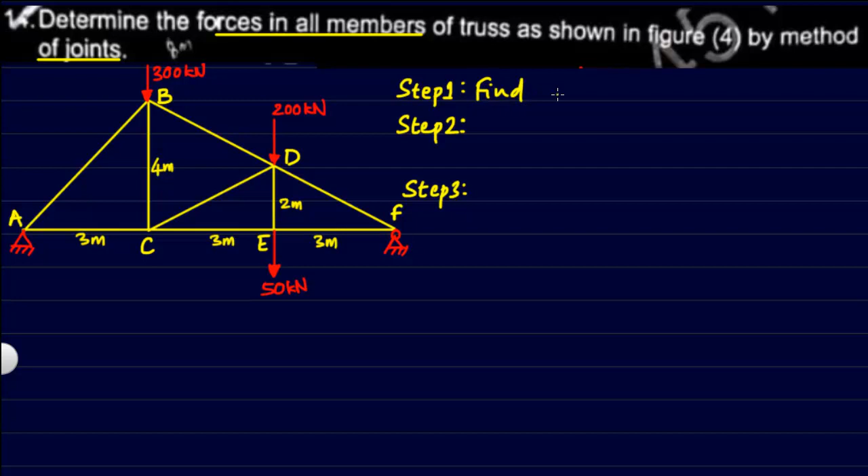Since the problem is going to be very long, let me walk you through the steps we will take to solve it. Step 1: find reactions at the supports. Step 2: take the FBDs of joints with 2 or less unknown forces and find them. Step 3: after solving all the forces, note them down in a table. Now let's go ahead with the first step.

As I told you in the first step, we will have to find the unknown reactions at whatever supports we have. While doing this, the whole truss has to be considered as a single body, and we take up all the forces on it to find the reactions RA and RB.

Since all the forces here are vertical, let's first take up sigma V. RA is positive upwards, so is RB, and the remaining forces are downwards, so we take them as negative. This being a problem of statics, the total has to be 0. This gives us the sum of RA and RB as 550 kilonewtons. Let's call it equation number 1, and let's go to the next equation.

Sum of horizontal components is of no use to us because there are no inclined forces here. So we will have to take up sum of moments, and one of the two points we can take as reference is either A or F. I'll just go with A.

Now I have to take the moment due to all the forces acting on this body about point A and add them together. RA is the reaction passing through A, so its perpendicular distance is 0, and hence it will not have any moment. So the force of 300 kilonewtons...

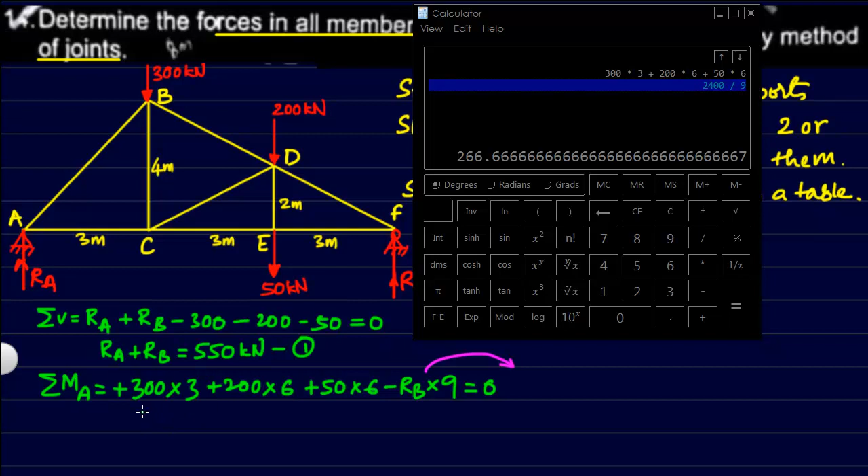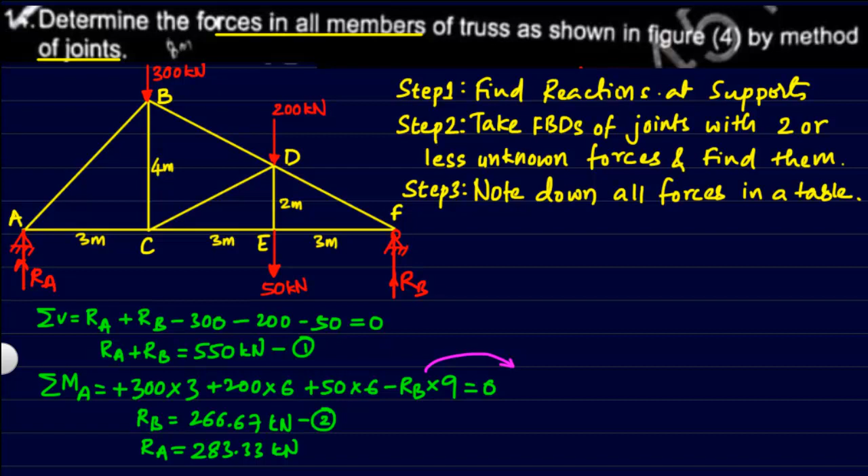Kilonewtons. Let's call it equation number 2, and by substituting RB value in equation 1, we get the value of RA as 283.33 kilonewtons. Now note down the reactions in the figure like this, and that completes our step 1.

For step 2, we will take the FBDs, that is the free body diagrams of joints. One of these joints we'll have to take - either A, C, B, D, E or F - and we choose it such that 2 or less forces are unknown at that point. So it's a good idea to start with the corners, which are the supports themselves. I'll start by taking this particular joint over here.

And now I have to put all the forces here. The force RA we were already able to find in step 1. The two other forces acting in the beam are AB and AC, so those two are unknown. This is the force in AB, and this here is the force in AC.

Now before finding the forces, we first have to find this angle here. In this triangle ABC, we know the opposite and adjacent. So alpha will be equal to tan inverse of opposite length, that is 4, divided by adjacent length, which is 3.

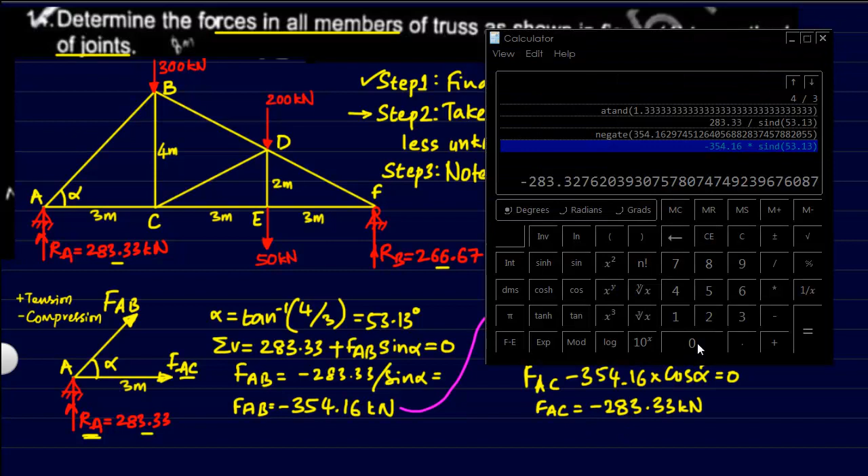Because the joint is static, in equilibrium, the total has to be 0. The value of FAB we can substitute from what we found, but be careful about the sign convention. Here, because FAB itself is negative, the positive will actually change to negative, and cos of alpha, this total has to be 0. So FAC we can calculate by sending this whole term to the other side. Calculating that gives us this result, 283.33 kilonewtons. So once again the result is negative, meaning it is actually compression.

So here I have written the two forces that we just found for your convenience. Now let's consider the next joint where we can find the unknown forces. Adjacent to A we have joint C, wherein there are 3 unknown forces, so we cannot take this as our next target. Looking here, we can see that one force has already been found and there are 2 unknown forces here, so this would be the right joint for us to take. Let me now take the free body diagram of that particular corner and start solving the problem.

Once again, wherever the beams are cut, we should assume that the forces are acting away from the point. This value here we already know, that's minus 354.16, and the other 2 forces are not known to us. So this will be the force in BC and this will be the force in BD.

Now, before starting the solution, we should know the angles. So these 2 angles are to be known. The angle here will be same as alpha, because these two angles become alternate interior angles for the parallel lines, and hence alpha will be same here. Coming to this angle, let's call it beta, so we can find it using this angle here.

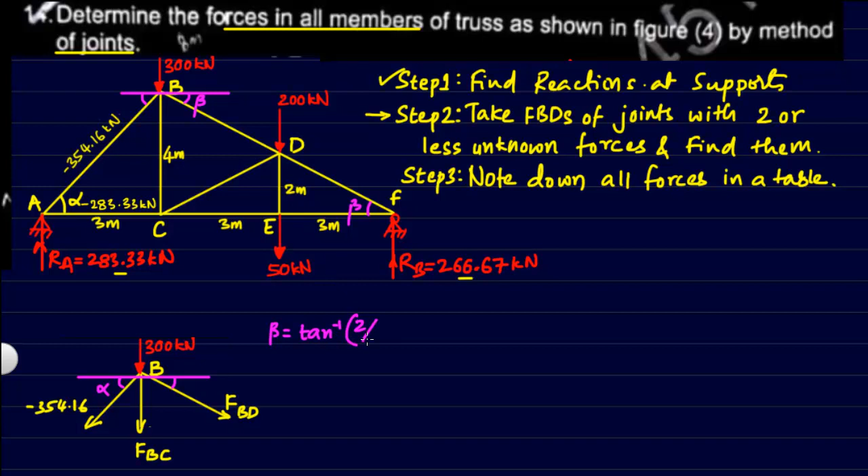So let's take up this triangle DEF. In that, again we know the value of opposite and adjacent, and using that let us find it. The angle beta will be equal to tan inverse of opposite length, that is 2, divided by adjacent length, that is 3. That gives us an angle of 33.69.

And of course alpha we had calculated before as well. Its value is 53.13. Now once again we will have to apply the equations of equilibrium here.

Let's start with sigma H, because FBC is vertical and we want to ignore it in our first equation. We want only one variable at a time so we can easily solve it. 300 kilonewton and FBC are both vertical, so they won't affect the horizontal direction. We take this force, minus 354.16, multiply by cos of alpha to get the horizontal component, then take FBD and multiply by cos beta for its horizontal component. We assume it acts on the right side, so the horizontal component comes out positive.

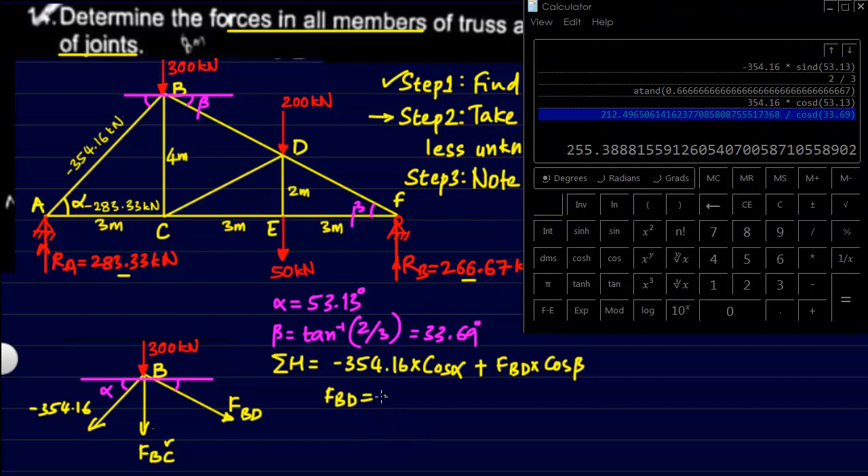When calculated, we get FBD value as 255.39 kilonewtons. Next we take all the vertical components and add them.

300 is acting downwards, so it's negative. FBC is also acting downwards, so negative again. FBD will have its component acting downwards, so negative, and to get that component we multiply sine of beta with this. Then on the other side we have the force minus 354.16, and we multiply sine alpha with this to get the downward component. One more thing to note: because the arrow in the diagram points downwards, we apply one more negative sign. This value as a force is taken directly from the diagram, and the extra negative sign is for the direction of the arrow.

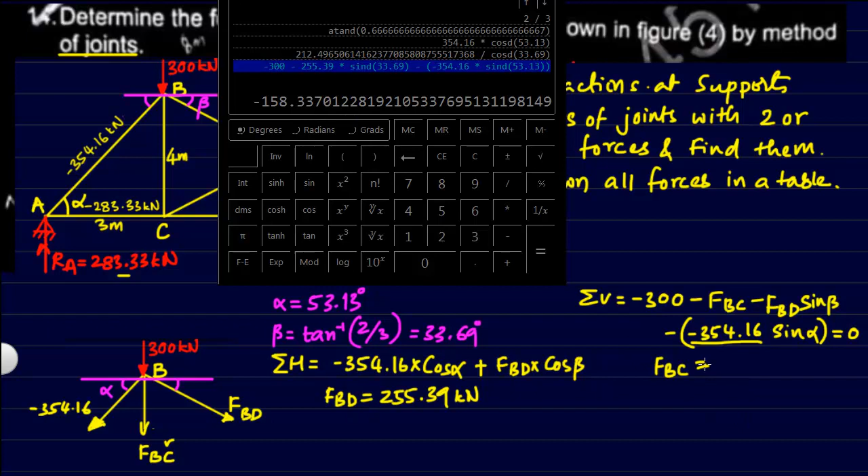Because this is a problem of statics, the total has to equal 0. Calculating this with the calculator, we get this value. You can pause the video to check the calculations. Just note down this: minus 158.34 kilonewtons.

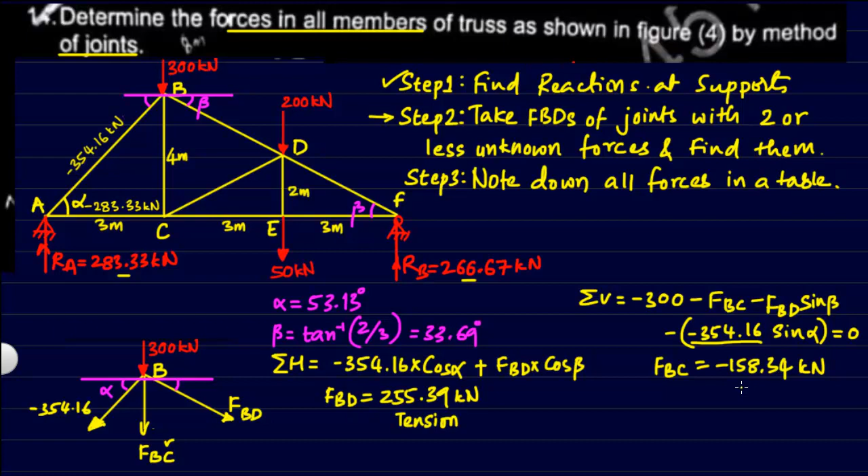So we have to understand, because the value of FBD is coming out positive, it is in tension, and because FBC is coming out negative, that means it is in compression.

The values we just found I have written here on the diagram for your convenience. Let's figure out which joint to take next.

Even though at this point C can be taken, because there are again only two unknowns, it's better to actually start from the other end because that provides simpler ways of solving. And as you already know, no matter what approach you take, the final results are going to be the same.

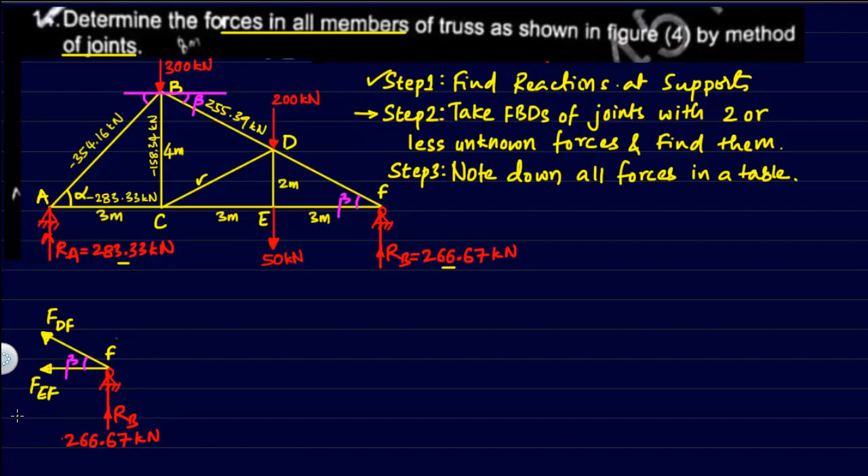So let me take the free body diagram of corner F and start solving. As usual, all unknown forces we assume to be acting away from the corner, and we give them names. This is FDF, and this force here is FEF, the force in EF. Here the angle beta, if you remember, we had calculated it to be 33.69 degrees.

Now let's apply the equations of equilibrium. I want to start with sigma V, because that will help avoid the horizontal force FEF. First we take RB, that is 266.67, and because it is acting upwards we take it as positive.

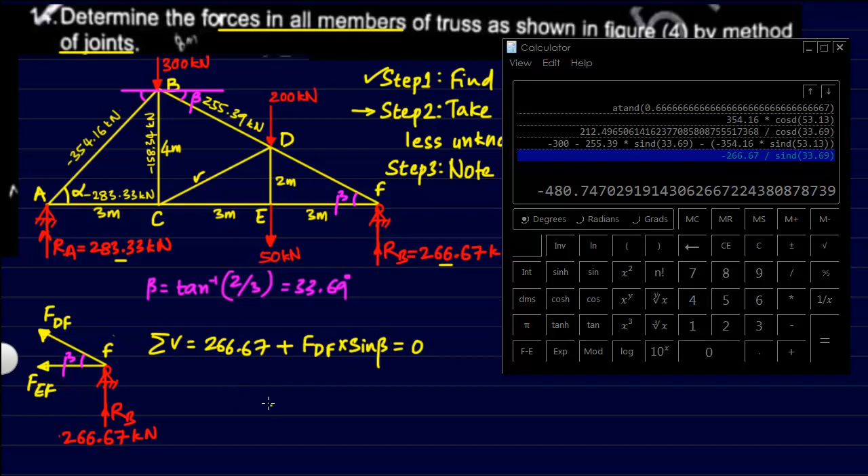Then we take the component of FDF, and because it is going up and away, we take it as sine of beta, and this component is acting upwards so it's positive. Again the total has to be 0 because it's in equilibrium. Doing the calculation for FDF, we get its value as minus 480.7. Because it is negative, that means it is in compression.

Next we take all the horizontal components. FEF is acting on the left side, so it's negative. The component of FDF, to get it, we multiply by cos beta, and because it's acting on the left, we take it as minus. Once again the total has to equal 0.

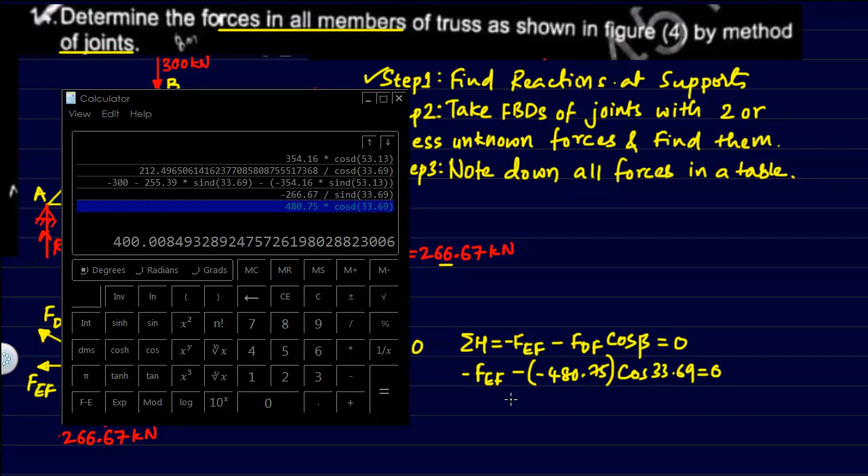Now let's substitute the value of FDF. So minus FEF, this minus as it is, and the value of FDF itself is again minus, and of course the cos of beta value being 33.69, total has to equal 0. The minus into minus will cancel out the negative sign, and solving for FEF, we get this result. Because it is positive, this is in tension.

Once again, I have noted these two forces that we just now found here on the diagram. That leaves only 3 beams in which we have to find the stress, and joint E seems to be the simplest of the joints for us to take up next. So let me take the free body diagram of joint E and put down all the forces. Two of these forces are already known to us. This force here is the force in ED, and this force here is the force in CE. Both of these are unknowns and we have to find them.

Equations will be very simple. Sigma V will just have FED acting upwards and 50 acting downwards, total equals 0. FED will give us 50 newtons. Of course, because this is positive, it will come out in tension. Then sigma H will give us 400 kilonewtons acting right side, and FCE acting on the left, so total of course is to be 0. That leaves FCE value for us as 400. Of course, even this is positive, so it will be in tension.

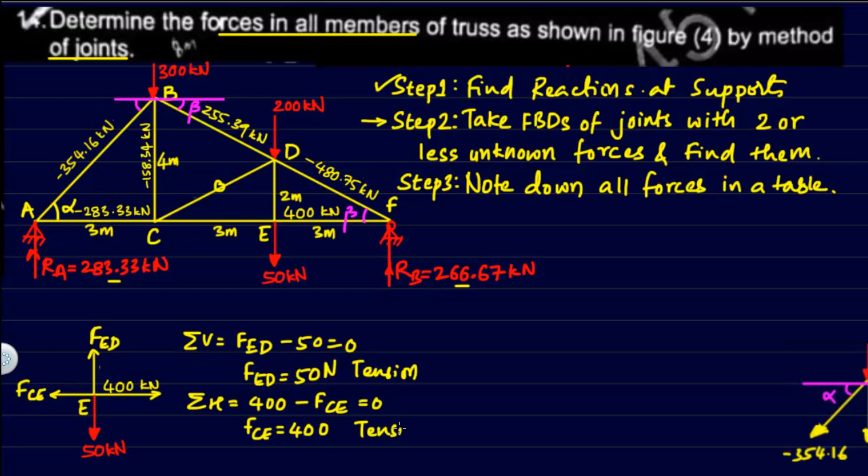Now that leaves us with only one truss, CD, in which we have to find the stress. So we can take up any one of the joints, either C or D. But the point D will provide us with a lot more complications than point C, so let's go ahead and take C. So this here is the free body diagram of the joint C.

So here I have noted down all the notations for the forces, and we will need this angle here. In the main truss, we can see that angle appearing over here, and you can see that these two triangles are exactly symmetric, actually congruent. So the angle beta will appear here as well, the same angle beta.

Since there is only one unknown force, we can either go with sigma H or sigma V. But since sigma V helps me avoid two of the forces, I'll go with that. We can see the force FBC is acting upwards, so it's positive. And the component of force CD we have to take, since it is opposite, we have to multiply this with sine of beta. In the diagram we can see it's acting upwards, so it has to be positive. The total, of course, has to equal 0 because it is in equilibrium.

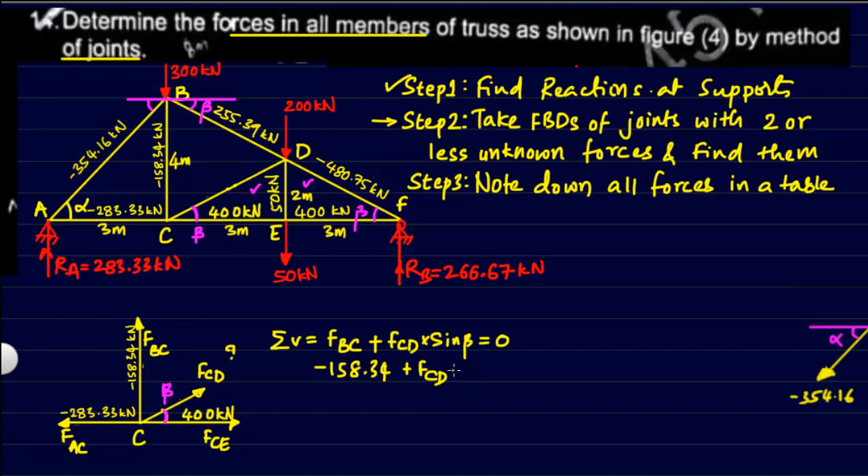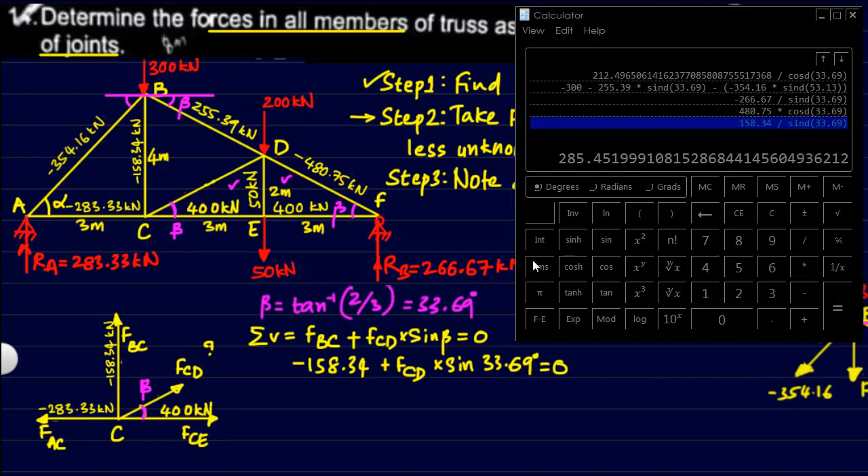Now let us substitute whatever known forces are there. So we know it's minus 158.34 plus FCD, which is something we have to find, and sine of angle beta, beta of course being the angle 33.69 degrees as we found earlier. This total has to equal 0. So doing calculations for FCD, this is what we get. Of course, this is positive and hence tension.

Let me put this force where it belongs. So that's it, we have found all the forces in all the trusses, all the elements of this truss, and this is how it appears.

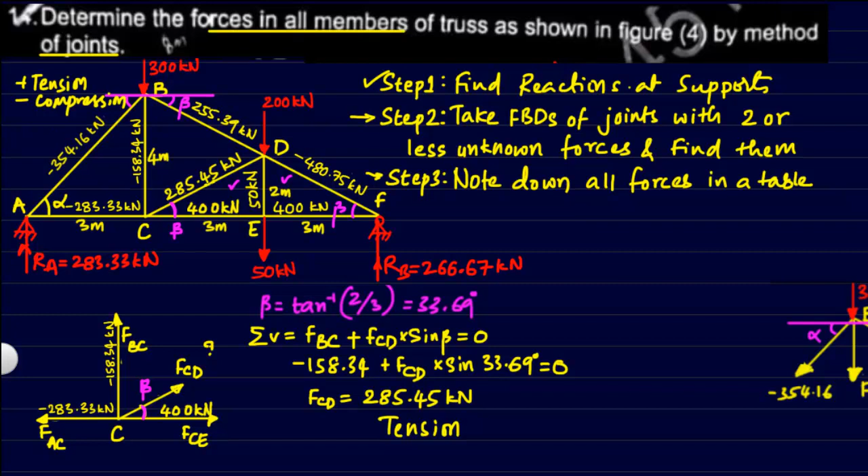If you want, you can just put them down in the form of a table, that's what I have written in step 3. Step 3 we were already covering by doing each joint at a time, and I was noting down all the forces in the diagram. So whatever forces are positive, they are in tension, whatever are negative, they are in compression. You can just put that convention down here, writing positive means tension and negative means compression, and that should be enough indication for the examiner as well if he intends to find out what it is that he is doing. So this is how the whole problem looks like.